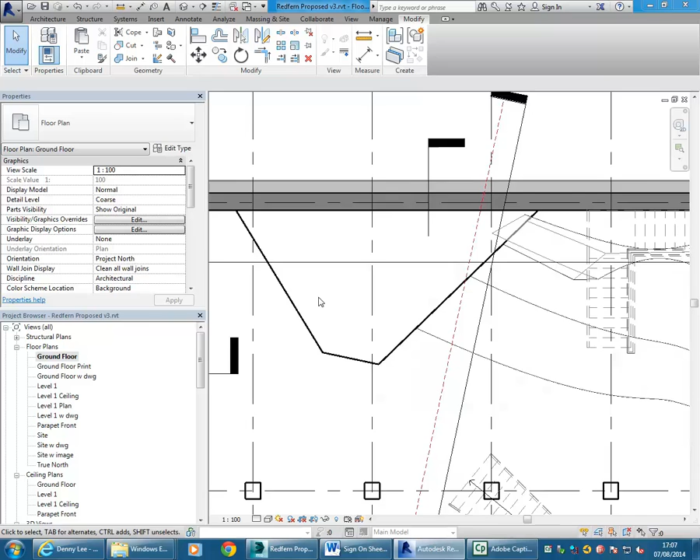So going back to this form here, that if you missed it, I did in video 18. And what I'm going to do now is hollow it out so it is a shape with an interior, or form with an interior, and so these will be walls with a thickness.

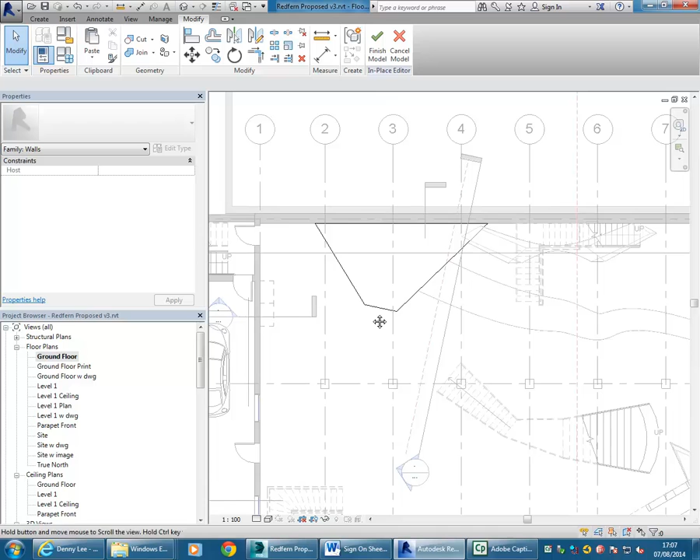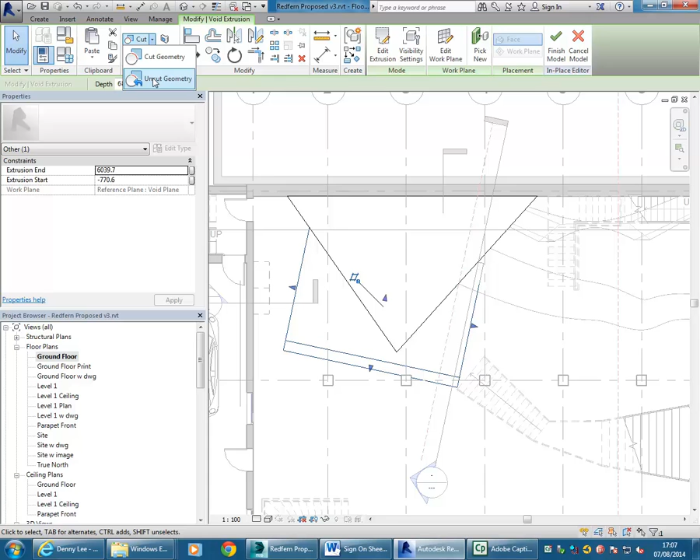And so going to edit in place, it'll take me back to the solid, and then you can see already if I go to select these things, the first one is the solid, and then I've taken the angle off the front using a void. So I'm going to select it, and just for the time being I'm going to uncut that so that they're separate things again, and that way you'll see the original form a bit more clearly. So uncut geometry, and then you can choose the things that are cut.

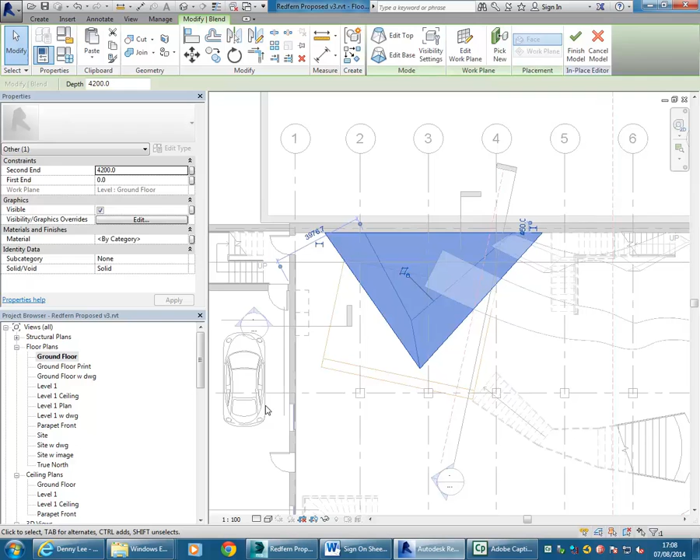So then back in the finished model, and sorry, I don't want to do that. So I just want to show it to you before I go out of it. So in the 3D view that I've got showing the interior, there we are. So you can see then the forms, and this one is simply an extrusion made from the side, but then the other is a tapering, basically a tapering triangle. So would you have an idea how to make a tapered shape like that?

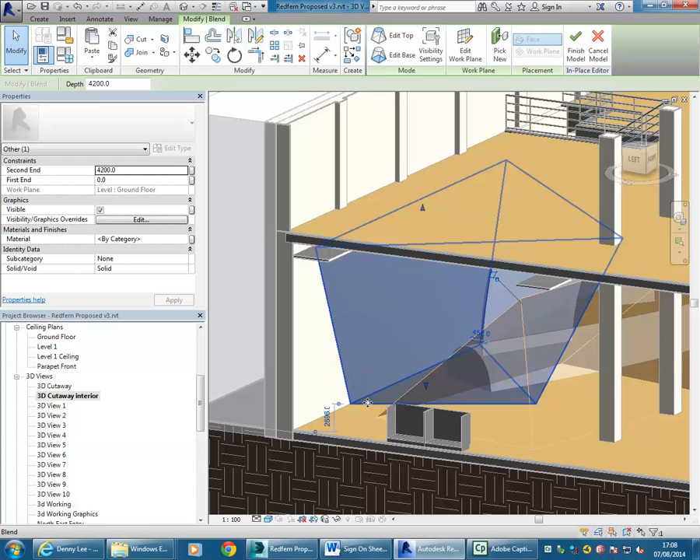Blend, exactly. It's that simple. That's right, exactly, spot on. So instead of using extrusion, if you want to taper out, just make one shape for the top, one shape for the bottom. If I go to edit base, you can see the shape for the first triangle, edit top, and there's a different triangle for the top. So going to the ground floor.

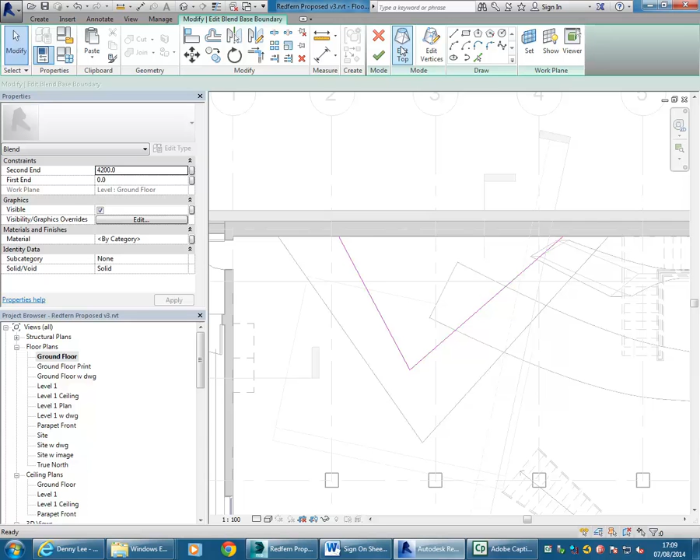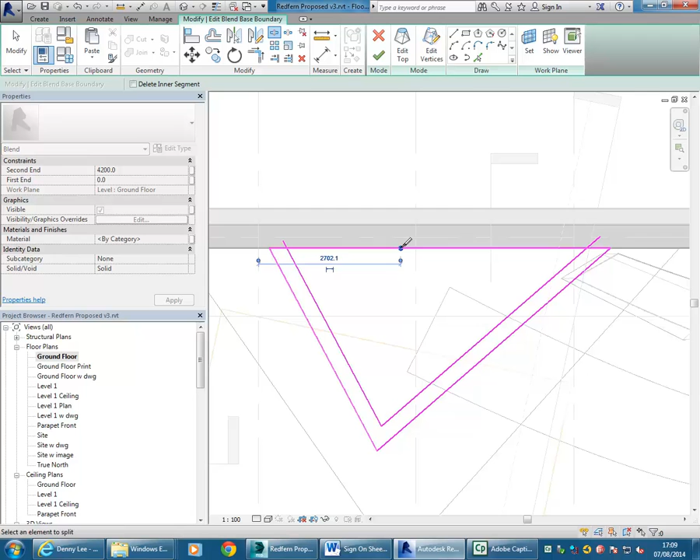Yeah, exactly. And so I'm simply going to go to edit base again and develop up that form. Just with offset, I'll give it a thickness. I'm going to leave it at 300 actually, that's good. Choose these lines, and with split, I'll break the edge at the top so that I can then use trim to corner and join this to make a closed shape that has now a thickness, just like a wall.

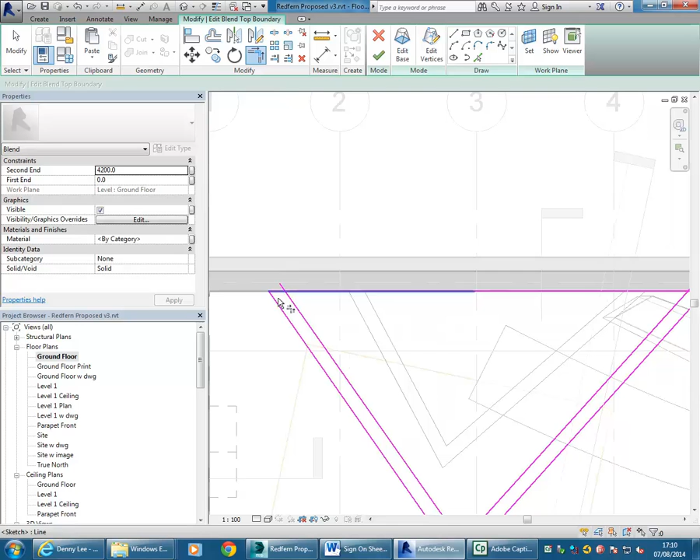Edit top, split again, I'll do right away, and then with offset I'll bring these edges in, just the same as I did before, just freezing up. Trim and... Okay, so then if I finish that, I'll have a look, and you can see already it's looking more like a wall. In the 3D view,

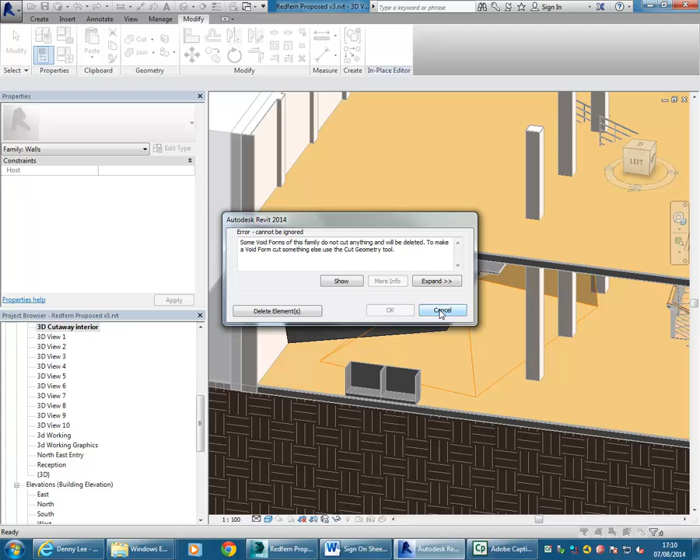you can see the void, and if I go to finish the model now, it'll give me that warning again, telling me some of the voids don't intersect anything, or don't cut anything. So it'll delete that element, and I don't want that, so I'm going to use cut, choose my void, and the solid again, and that's actually the sort of thing I was trying to create.

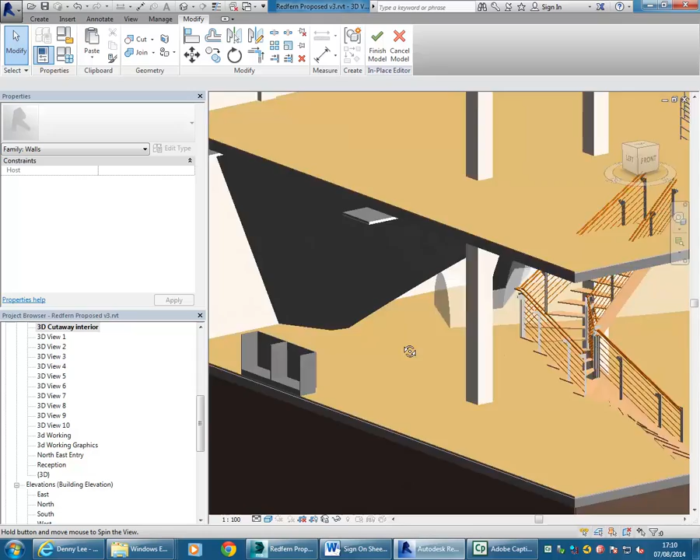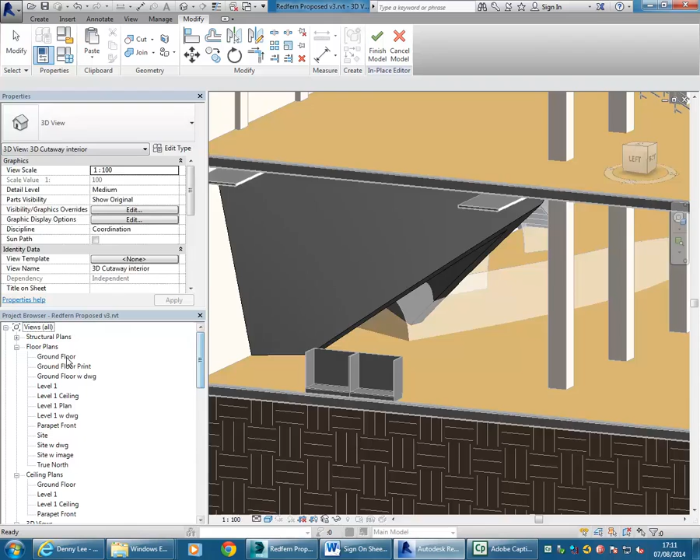And it's amazing, you see people do all sorts of complicated things to try and make these sorts of forms, when really it's just a combination of 2D profiles. Yeah, well, two profiles, yeah, but that's the right idea. So a blend, which is two profiles, and one extrusion, which is the void from the side. And so the void is really the more interesting thing, because it's made not from the ground plane, but from this reference plane that I've made to one side here at an angle.

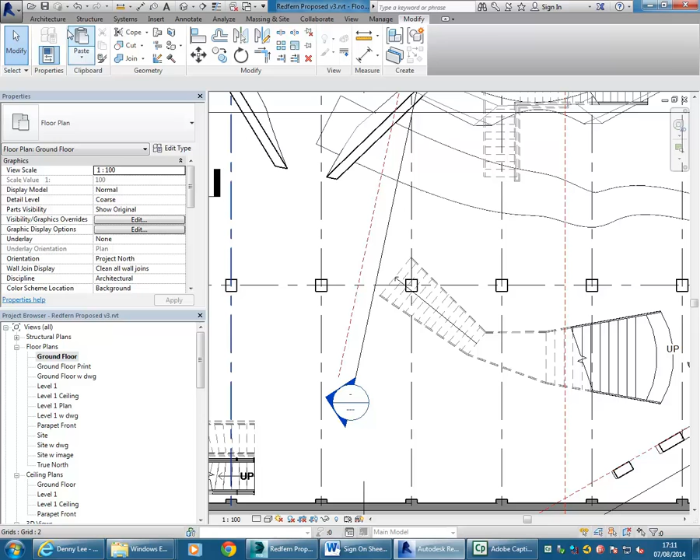So I'm going to finish that model and do another one just to show you how I did that, and that's really the thing I wanted to emphasise. So maybe I want something coming over here that's again going alongside this stair I've made. So I'll do yet another reference plane. You'll see I've done a lot of this in the previous video, but I'll show you again. I've just found it helps to do the reference planes outside the family. You can make them within the family, but then they're harder to access when you go to do other things.

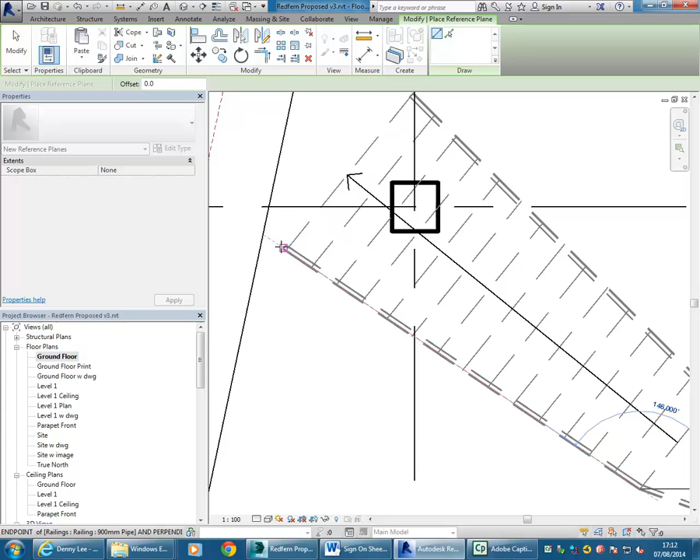And there's another trick I want to show you. So with reference plane, I'll draw something at the same angle as the side of the stair there, which is really what I'm trying to pick up. Stretch it out so that it's easier to see on its own. And here's the real trick. You might remember this from the very beginning in CAD 1. I did show everyone this, but you've probably forgotten. Select it, and in properties you can give it a name.

So yeah. So I'm going to call it stair angle, should do. And you'll see when you select that reference plane, the name will come up in the view.

And then here's the other trick that not many people know. You can draw a section then following that angle. So snapping, you'll see we'll trace that reference plane. Now if you don't do it in the right order, if you try and do the section first and then get the reference plane to line up with that angle, it's very difficult. You won't snap to the section, but you will be able to snap the other way from the reference plane to the section.

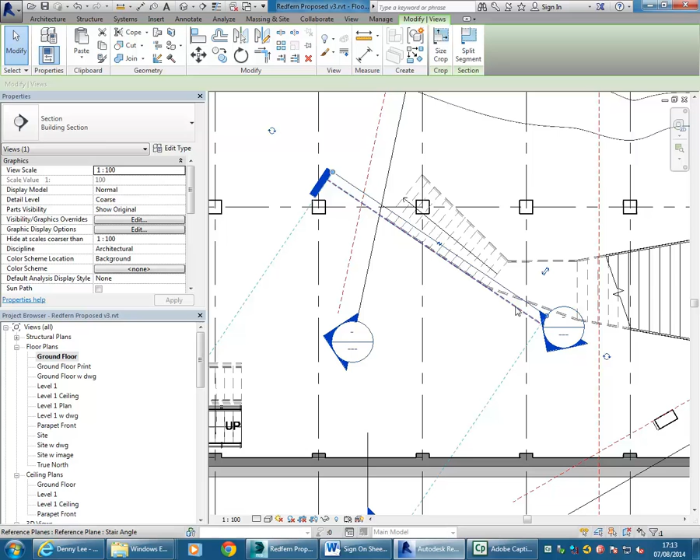Now I'm just using the arrows on the keyboard to nudge that section away from the reference plane. So that way I'm looking at anything that I draw on the reference plane instead of looking through it. It's a really important concept. It's much easier to draw parallel to or perpendicular to the plane, looking straight at the profile instead of drawing at a funny angle to it. And that's the main trick I want to show you.

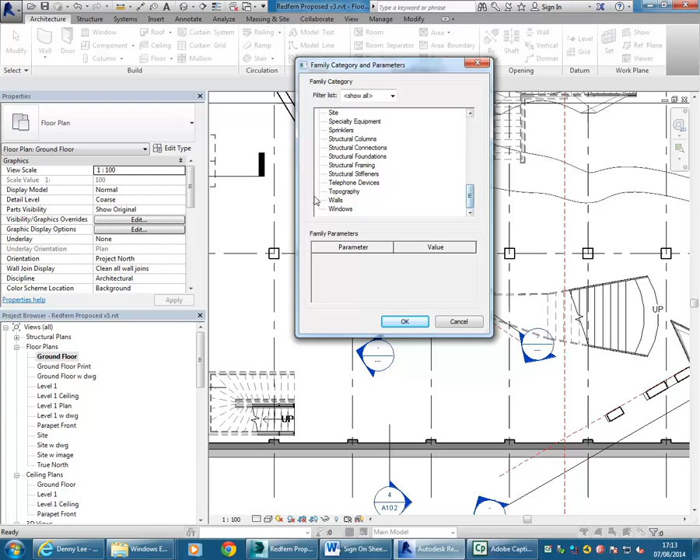Now it's very easy to go into model in place, and I'll set walls as my category. Okay, and I'm not going to do anything too complicated. Firstly though, I'm going to go into the section view by double clicking on the arrowhead. Straight away we know it's working because I can see these stairs dead on from the side.

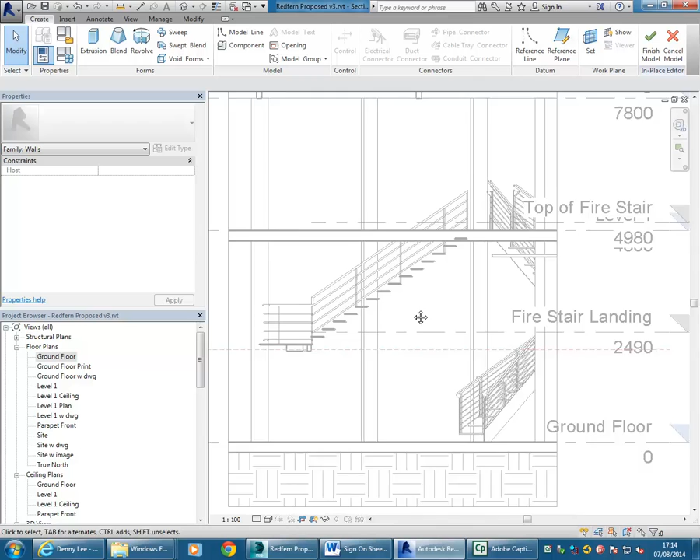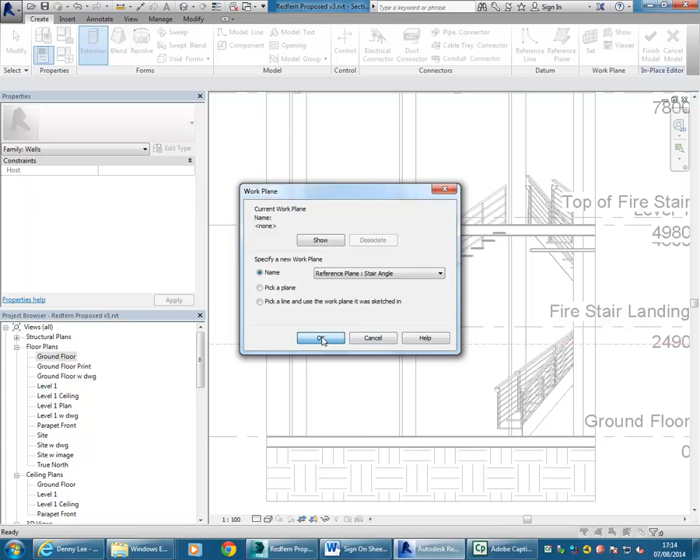And then with extrusion, it'll still ask me to choose a plane. It's not clever enough to know, so I need to go and choose the stair angle plane that I've made, and that's really why you need to give it a name, so that you can choose it from this list. Okay, and then drawing lines. Just going to do some sort of, again, angled thing. Chopsticks, whatever you want to call them.

Guys with PhDs, I've seen them running around talking for hours about chopsticks and things like this. PhDs in architecture, I mean.

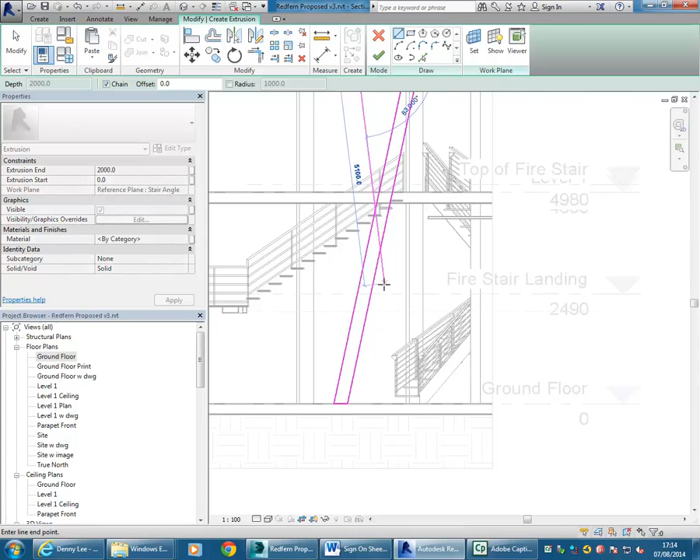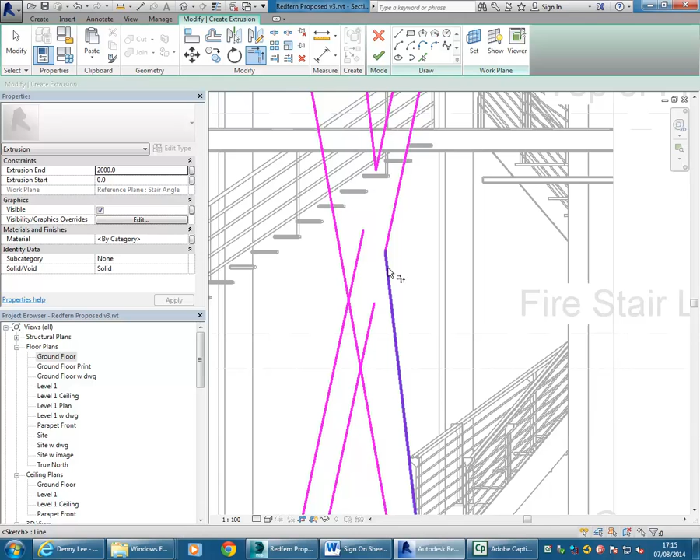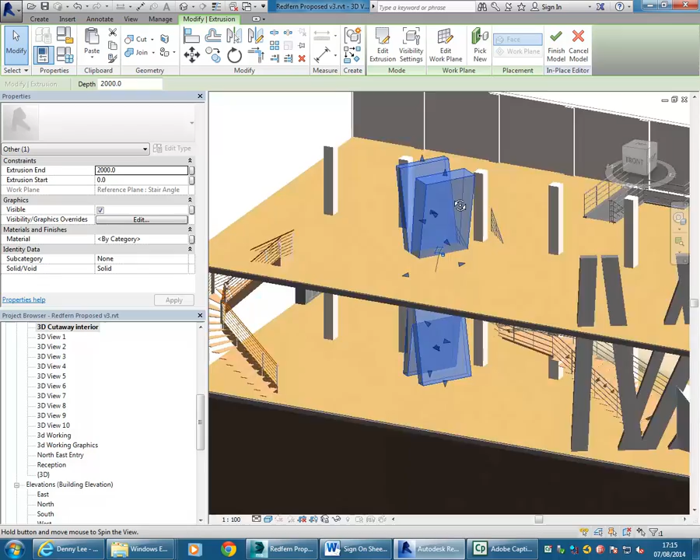Okay, so I'm just using split there to break those lines in half, which makes it possible to then trim them. I've got my shape that I want. Finish in 3D. If you check that, the depth is maybe a bit much, so it's also right up against the stairs. I don't necessarily want that. I'm going to move those stairs later anyway because they're going into a column, but the angle will stay the same. So I'm going to move this over. You can always stretch the depth easily.

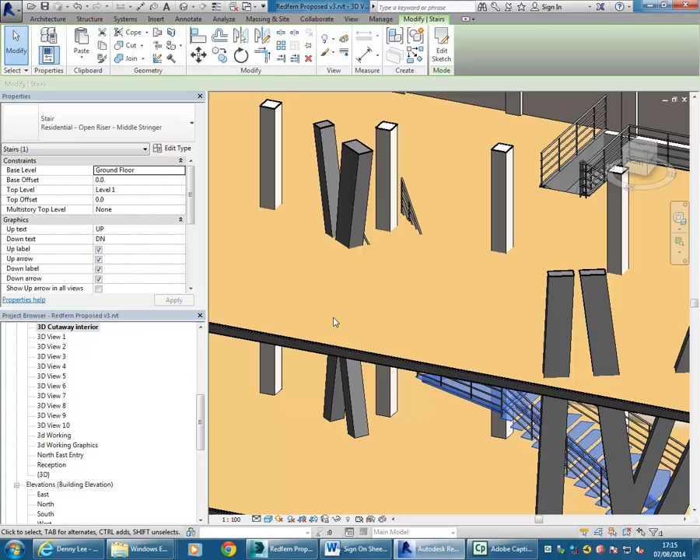Okay, so that's the main concept. I'll finish that model, and then while I'm at it, as I said, I'll move the stairs over. And maybe it is a good chance to, we've got a bit of time. So nudging this or just dragging it into a clear space. So it's got room. Oops, don't want to get into the column again. Should just make it, I think. There we go. Fantastic. And this family might be tempting to then start dragging that around as well.

Avoid that if you can, because remember, it was defined by that original plane. So once I move it away from the plane, the relationship to the plane is changed, and if you go back to edit it, well, it's confusing for you. It's going to be even more confusing for Revit. It will get thrown out by that. So if you move it, try and move it with the plane, and I'm going to move it with the section view as well. So I've used Control to select those things, all three, and now I can move them as a group back to near the stair, which is where I want them.

So notice it moves in a funny way. It doesn't want to move the object here, I'll just do that again so you can see. I've got constrain turned off, if you know about using that. That's not the problem. So here, if I try going left and right, the section and the reference plane are moving. Show you again. Okay, so I go back up and to the left. But notice this object isn't because it's constrained to that plane.

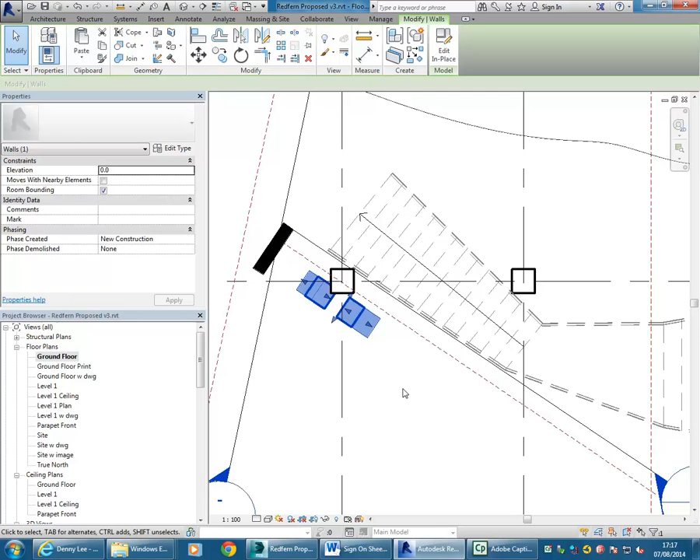I'll select it instead, edit in place, look in the section, and I can move it here. Not a problem, because it's moving along that plane. Okay, so back in the section view, go the other way.

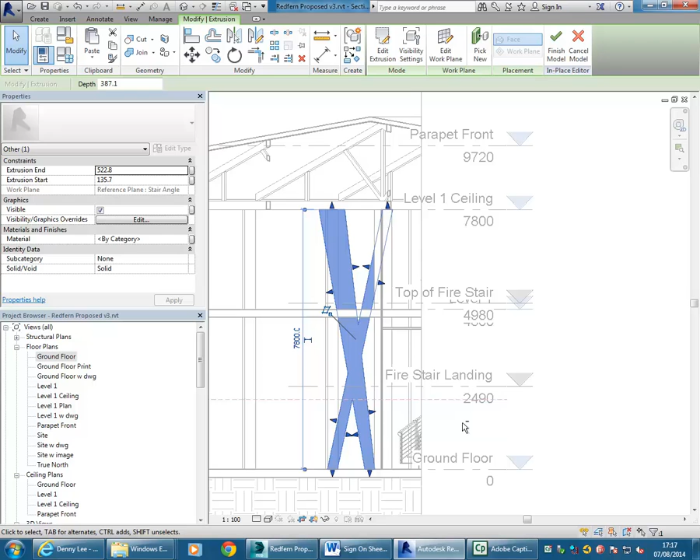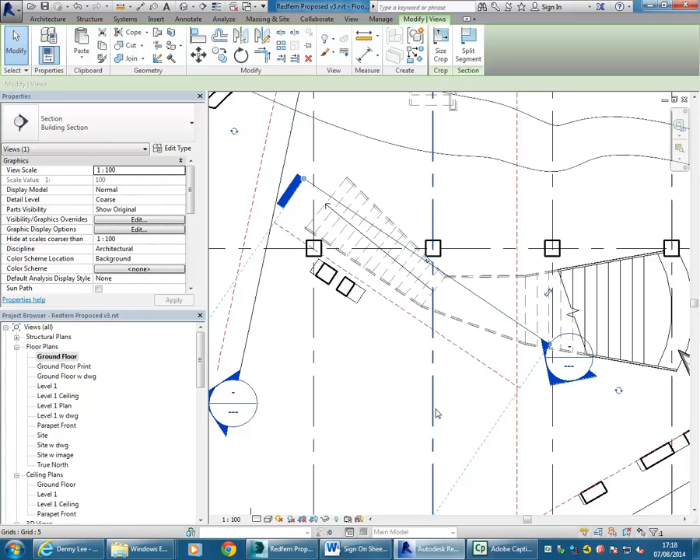Okay, so it's fine. Notice it's a bit hard to tell now what's happening because of the view. It's not the object, but the section view is not showing the stairs, so I'll drag that away. Back in the section now, we can see the stairs and the relationship between those two things.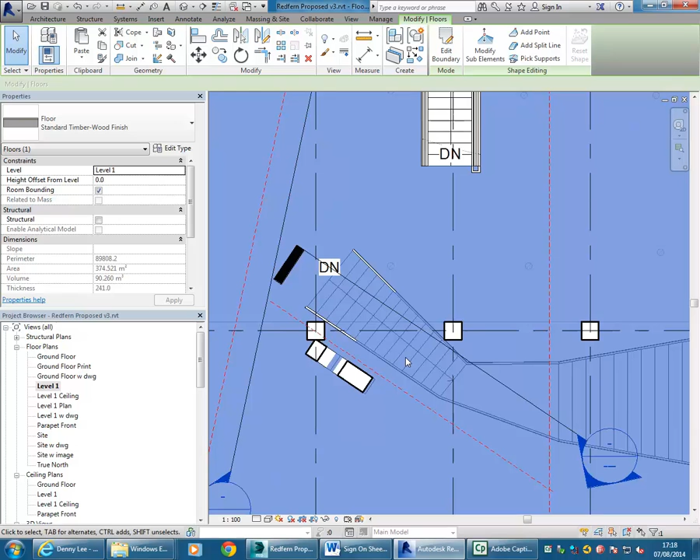That's starting to work. Finally, since I didn't show you this in the previous video on stairs, very quickly, to have the stairs visible on the upper level, I'm going to edit that boundary and cut a hole in the floor, which I'm just doing by picking lines from the stair and the railing.

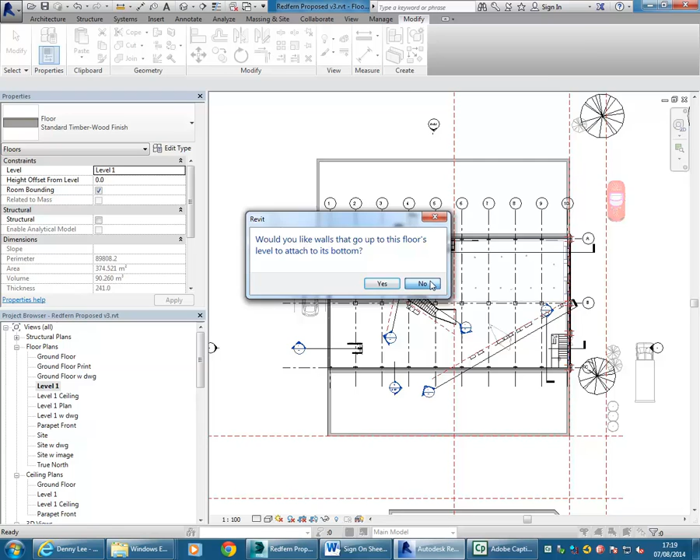When you do that, you'll often be asked again if you want to attach things to the floor. What do you reckon you'd say here most of the time? No, that's right, no. This is one of the few things where you say no in Revit most of the time. I don't know if the developers would recommend this, but this is what I'd do because I've attached the things I want attached. I don't want it attaching things for me at this point, so no. If you're asked to join geometry, say yes - you always want things joined, but usually you don't want it to attach things for you.

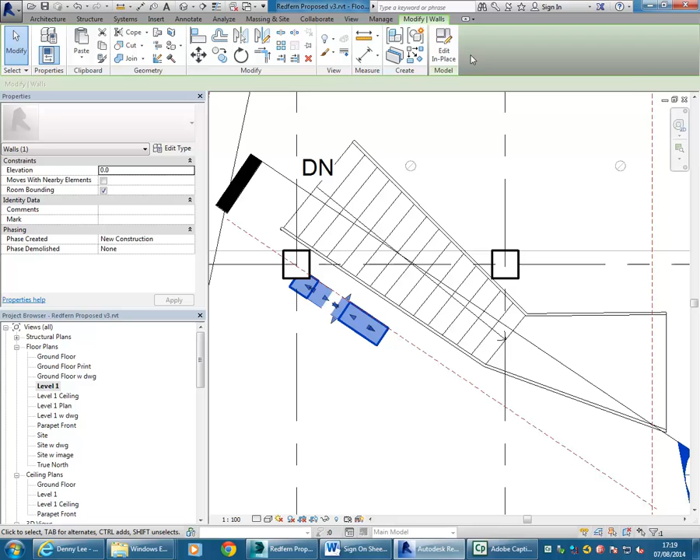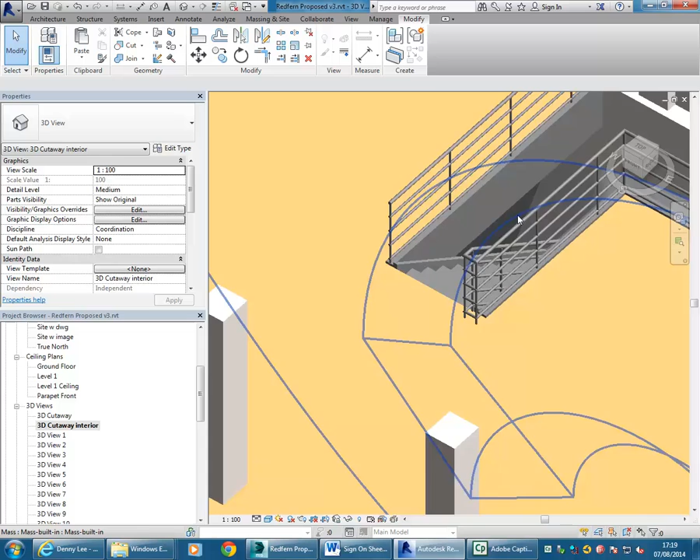So finally, into the 3D view. Oops. So it's getting there, but I've got this ceiling coming through my stair as well, and you need to think about that in the same way you do your floor. So just like the floor, I'd have to select it, edit boundary, back in the plan, any plan, and take away the parts where the stair goes through it.

Anything else you can see that's obviously wrong with that stair? Thinking about Australian standards and conventions? Exactly - don't have a down arrow. Never show down arrows anywhere except America. Oh, I'll show you, there's an option. So most countries don't use down arrows, it's just America. So I'll show you.

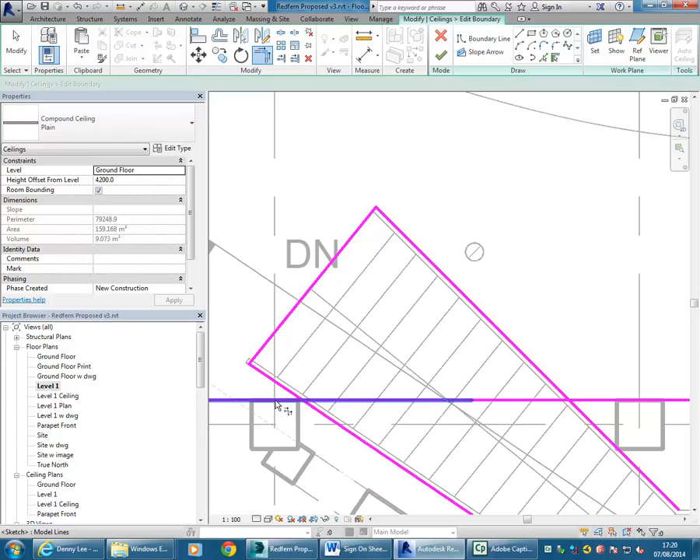I'm just going to finish that ceiling, and then when you select any stair, you've got this option here, which is a great thing in Revit: show up arrow in all views. Tick that, and most of the time you don't even want the labels, so you can turn the label off and it will just have the arrow. But with the label on, it'll at least always have up when there is a label. Again, I don't want the label.

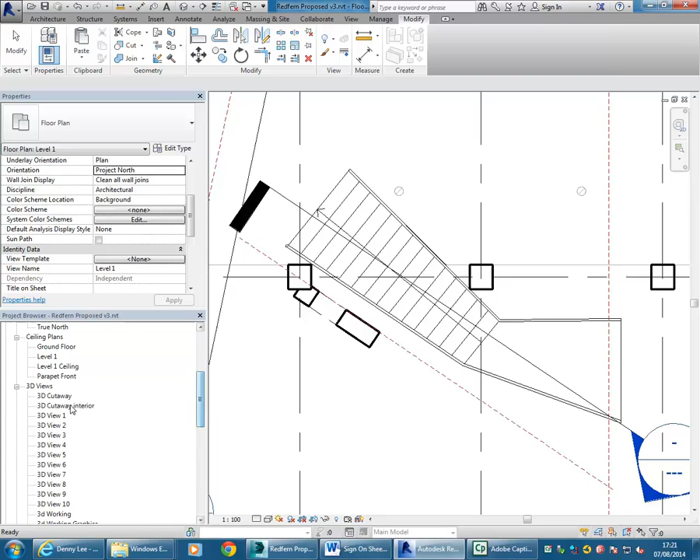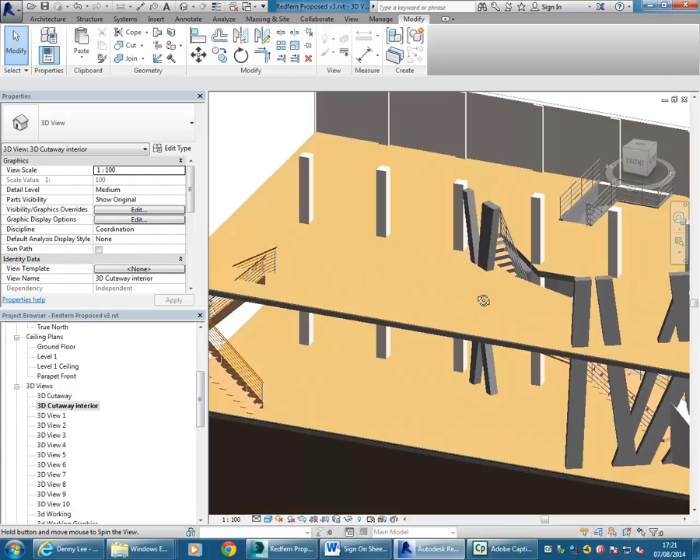So back into 3D finally, and the stair's clear. I'll nudge this over - so again, nudging left and right, not a problem. Now, that's it. So again, just to hopefully give you a bit more confidence using different planes, think about how you use your reference planes.

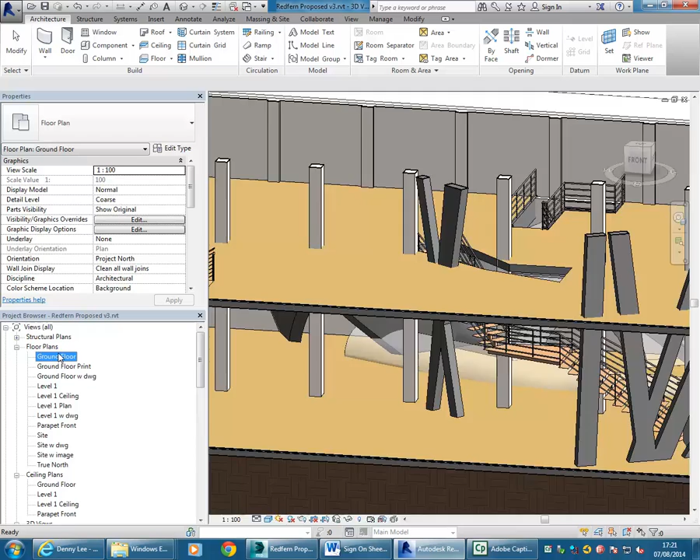And again, you can see it's great doing them in 3D, but you can always create those in a plan view. Or going further, you might have thought about things that are at an angle, projected at an angle from the ground plane. So I won't show you a solid made that way, but this is about the most complicated thing you can do with a solid in Revit if you want to try things like this.

Say if I wanted to make things off the side of this now, you can draw a plane, a reference plane, in a side view, in a section. Right, and I can give that a name, just like I did before.

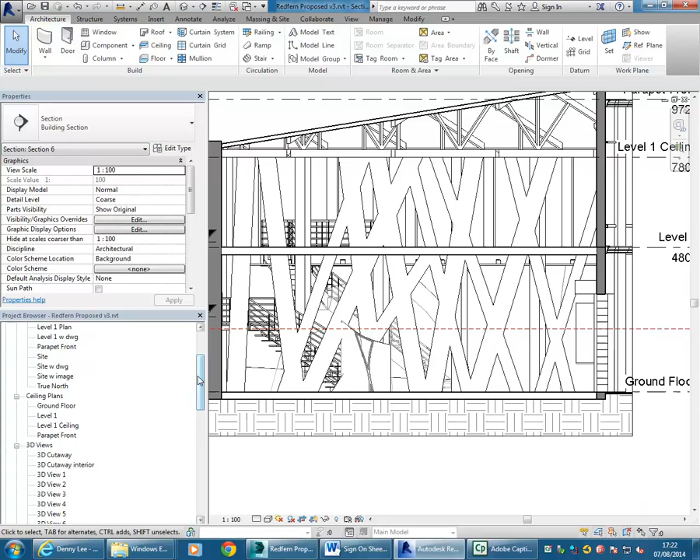And that will be - remember, this view is already at an angle, that's not a perpendicular view. So that's twisted already, and then I've twisted again. I could even do a plane from here at a different angle, and so you can get some pretty complicated things that way. But I won't demonstrate that - it's probably going a bit too far. It might give you some ideas.

Anyhow, I'll just finish that on the 3D view there. That might give you some more ideas.